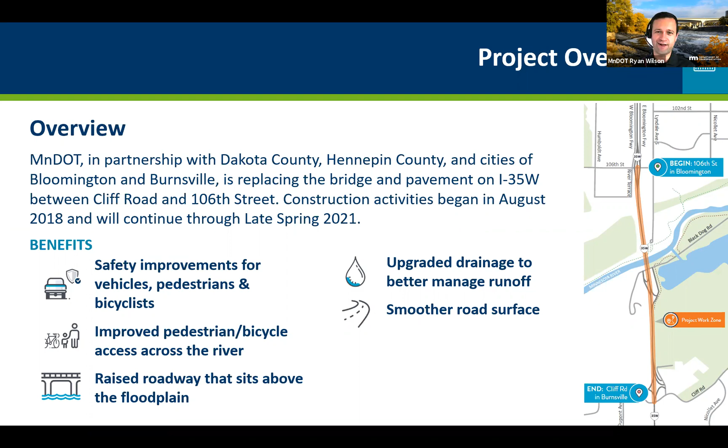We're also facilitating a trail on the east side, which I'll mention in a moment. The bridge itself, and all work on this project, is substantially complete. We have some cleanup items over the remainder of the summer, but the bridge is done. There was a deck planing recently done, a final deck planing of that surface just to improve ride smoothness as we wrap up work on the structure itself.

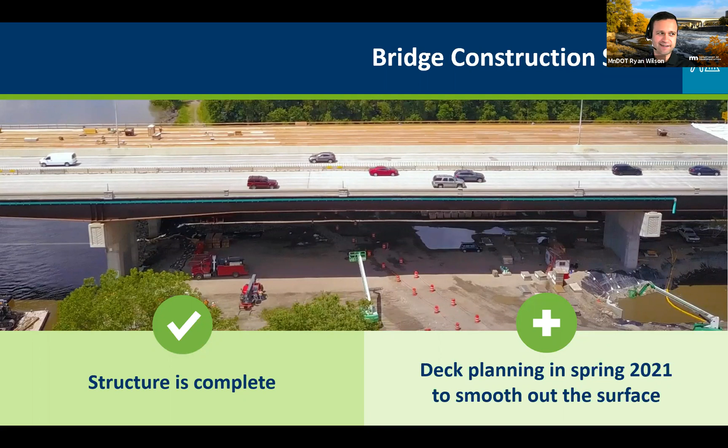The pavement itself is also essentially open. We have the bridge open, 4 lanes open. The final pavement layer was completed a couple weekends ago. Lanes and ramps are now open. You can expect some periodic lane and off-peak closures for wrapping things up - some pavement markings, lighting, and cleanup work at various points of the project.

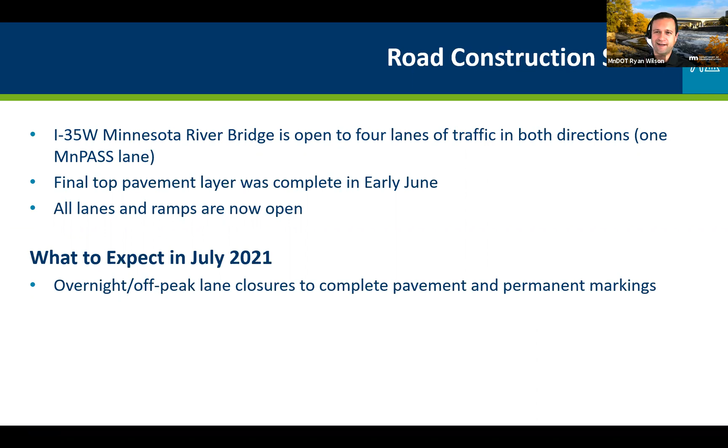I did mention the trail. This has probably been on the radar of quite a few, as Bloomington and Burnsville have an extensive trail network currently and envisioned for the future. This facilitates a new trail on the east side of the bridge to help make connections to the public system, connecting Black Dog Road on the south and Lyndale Avenue on the north in Bloomington. It's a relatively wide structure, allowing walking and bicycling with room to pass, which isn't the case on some of our older structures. We have a joint maintenance effort - MnDOT has responsibility for the bridge itself and longer maintenance, and we have a partnership with the cities on maintenance for snow and ice.

I'll move into a continuation along 35. We have a couple of initiatives, and this is where I'll sneak in my super secret agenda item. South of where the River Bridge project ended, in 25-26 we have a very large pavement project planned on 35 - an unbonded overlay. This means reconstructing the road or building a new concrete road on the existing surface, overlaying the ramps, addressing ADA improvements along the corridor, and replacing 2 or 3 bridges in Burnsville. There will be traffic impacts on the main line and on the bridges. Not all bridges will be closed at the same time - we can't have that kind of limited access through Burnsville and across 35 - but it's significant.

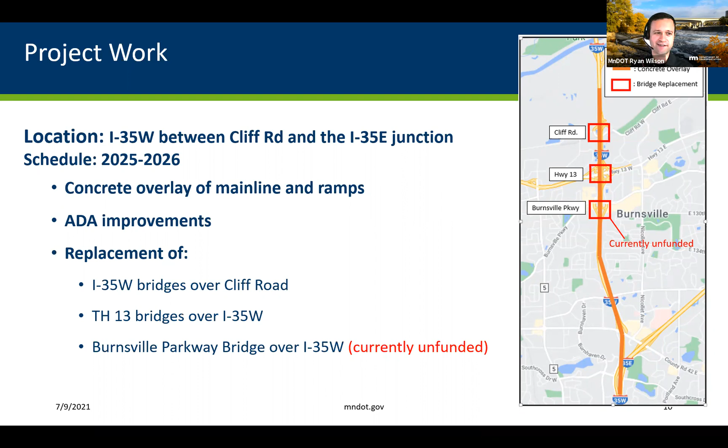The other thing we did in advance of this project is we undertook a spot mobility study to assess what types of things we might be able to add to improve mobility in the corridor. We know I-35, like many of our corridors, has certain locations that could benefit from relatively small dollar improvements and make a big difference in terms of improving congestion, minimizing slow spots, and reducing spot safety issues. So we undertook an exercise to assess where some of those opportunities might be on this corridor, and worked towards including some of them in this project.

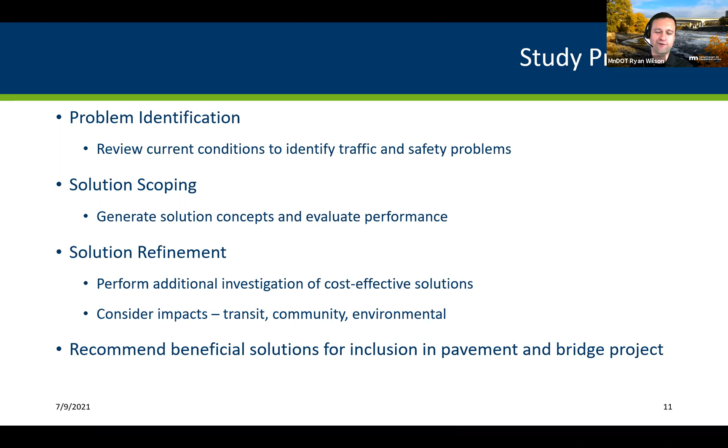I will not go through these in detail. I'll show you the couple that made it out. I just wanted to give you a sense of what we do in an exercise like this. We have quite a few spot locations, and this is a list of some of the ones that made it through the first screening process.

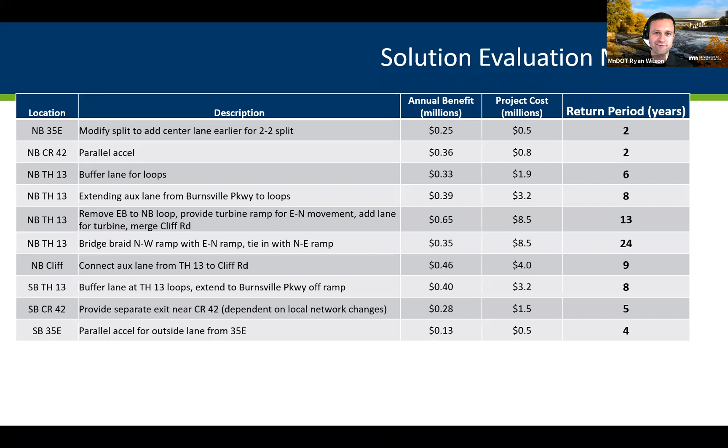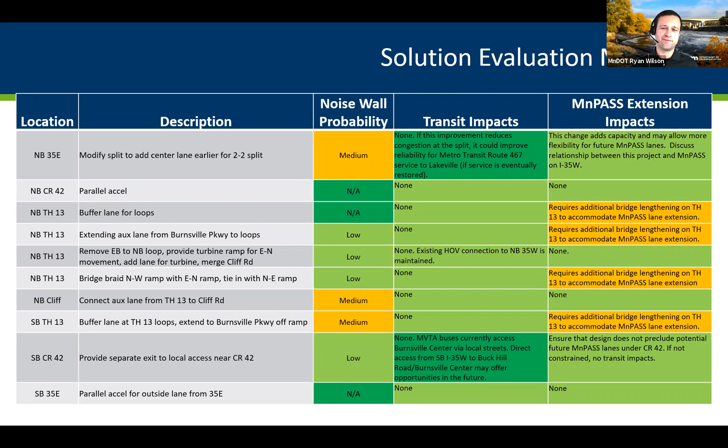We essentially evaluated those spot improvements for their cost and annual benefit, giving us a return period. We also weighed that against less quantitative but important qualitative criteria: noise wall impacts, impacts on possible transit service, and what it would impact in terms of a possible MnPASS extension at a later point in time. And that brings us to a range of feasible solutions.

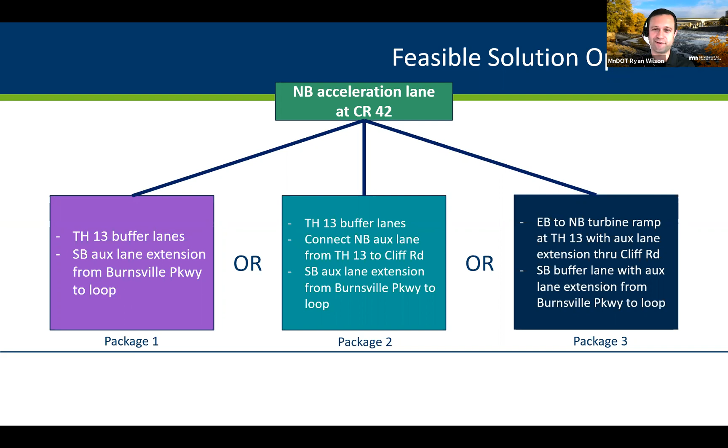This is that northbound acceleration lane. North of County Road 42, this is a pinch point that's been around for quite some time, with vehicles merging onto 35 north from 42. This is one that will almost for certain be included in this project and exist in all the funding packages.

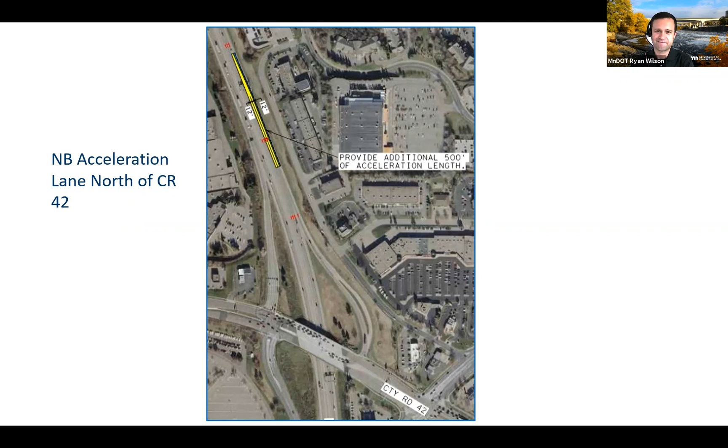This is another concept that did well and is in our base funding package that we plan to include at this point in time. This would be the creation of a northbound buffer lane at Highway 13. The purpose here is to try to provide additional space and opportunities for vehicles to merge from 13 into 35, which is again a fairly known point of congestion. We're rebuilding this bridge, so this allows us to take on this improvement at a relatively low cost, as opposed to doing it by itself at some other point in time.

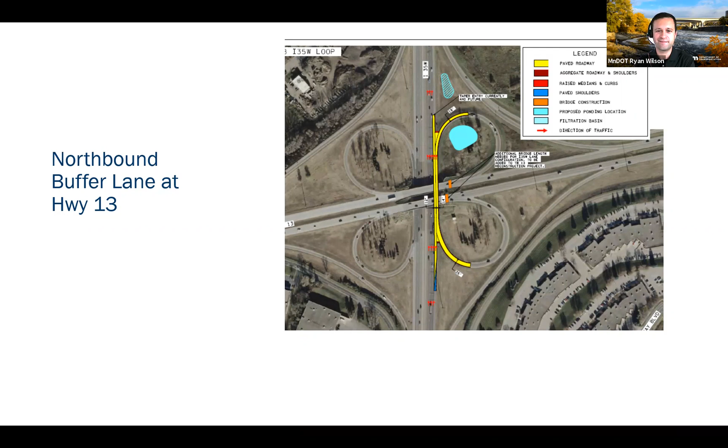This is another concept, in our middle funding package that we're contemplating, with a good chance of getting carried forward. This is a buffer lane in the other direction, again buffering at that Highway 13 merge point with 35 southbound this time, and then trying to extend that auxiliary lane - better called an auxiliary lane - from Highway 13 to Burnsville Parkway.

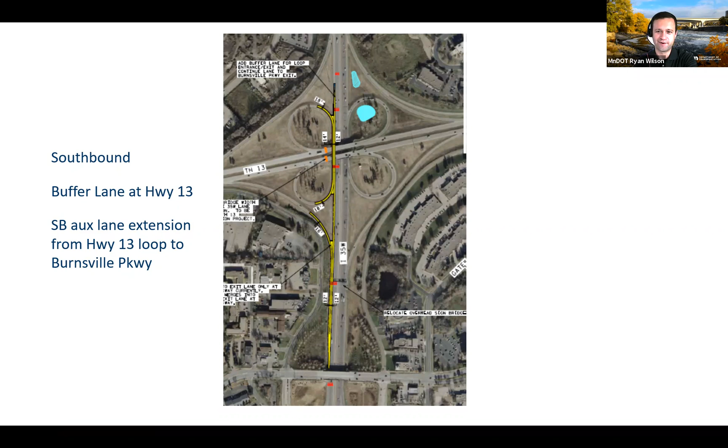And then finally, this graphic for some reason came in very grainy. Apologies about that.

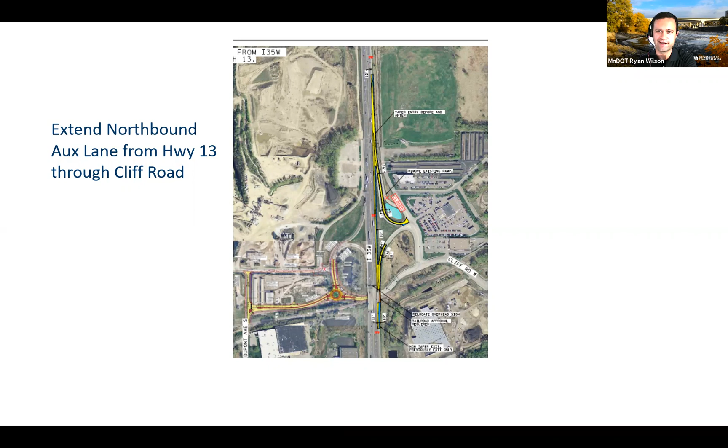And this is the one that is kind of on the farther end of the funding spectrum, but extending an auxiliary lane from Highway 13 up through Cliff Road, again, solves some of those challenges.

Next, I mentioned we're trying to figure out how to weave these improvements into that pavement project, and we have about 8 or 9 million in mobility money that we're trying to package into this broader $90-100 million project.

And so all these solutions have some moderate noise wall risk at Burnsville Parkway and Highway 13, but no impacts to transit. And we would be able to address some of the bridge tweaks that would be necessary as part of our project, given that we're replacing those bridges.

Next, I think I have about 5 minutes left here to talk about Highway 13. So Highway 13, this is a project that may be on some of your radars, that we have a relatively large

environmental assessment going on. In fact, the public comment period just closed last night, if I'm not mistaken, which would be looking at Highway 13 from 101, 169 through Nicollet Avenue in Burnsville, and trying to understand what the needs are on that corridor and reach some type of consensus about what the long-term vision is.

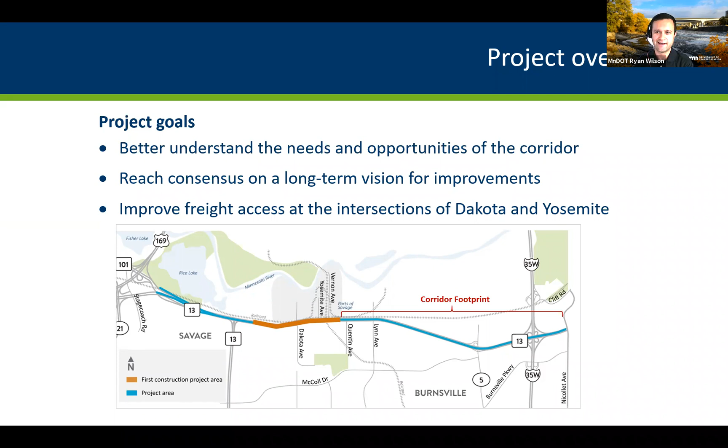Next. And you're all well familiar that Highway 13 is a road that does carry a fair amount of traffic for its size. It is identified on the National Freight Network. It carries considerable freight volume, and it has a number of intersections that have crash rates above what we would call our critical crash rate for similar intersections.

And it's really not—I have attempted to bike along this corridor in part to experience it, and it's not the easiest place to move for bicycle and pedestrians. So I think trying to accommodate those users in this vision is also very important. Next.

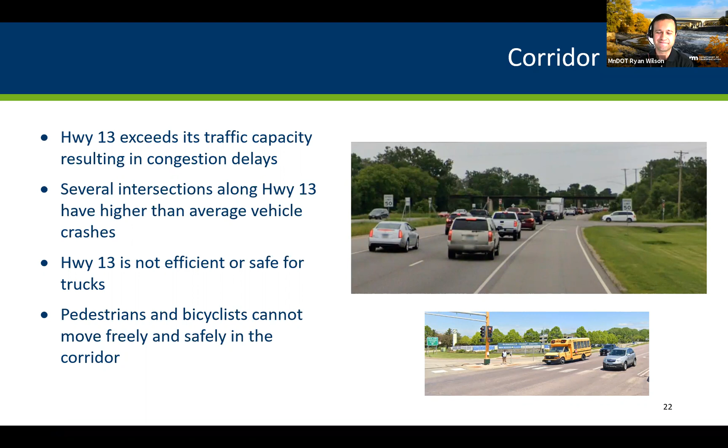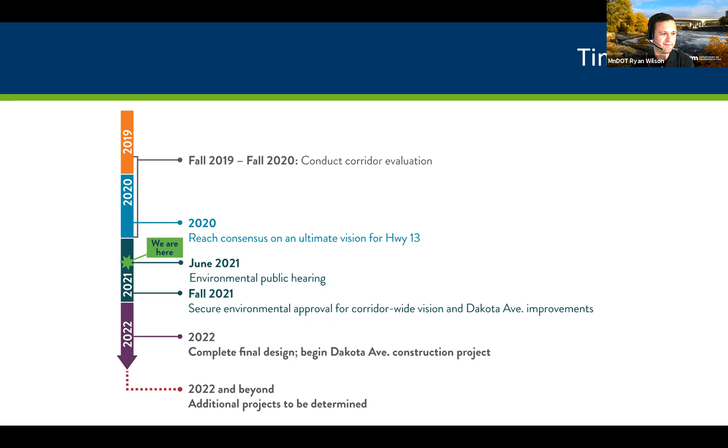So next, please, Jen. So when I talk about a corridor vision and footprint, what does that mean? So we're defining a corridor vision and a footprint of what that vision would require in terms of space or right-of-way needs or environmental impacts for the whole corridor from 101 to Nicollet Avenue.

And by clearing that environmentally—like this broader vision of potential, kind of a maximum footprint, if you think about it that way—by clearing that maximum footprint in one environmental document, it allows us to tackle successive construction projects in the corridor as funding opportunities become available.

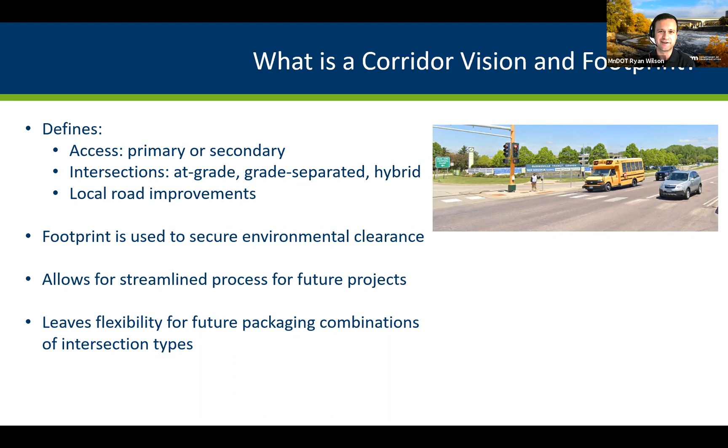And so it's a different process, what's called a hybrid environmental assessment. We're actually the first agency that's kind of undertaking such an approach, and it seems to be working really well, and it really does allow for that flexibility to address the future corridor. You have less work to do if you can look at it that way as you get to future successive construction projects. Next.

If you haven't ever seen this—so the hybrid EA process has involvement from all the partners along this corridor, has undertaken quite a bit of public outreach, and this is the recommended access scenario. Again, future projects could modify this, but this is the recommended access scenario out of that hybrid EA.

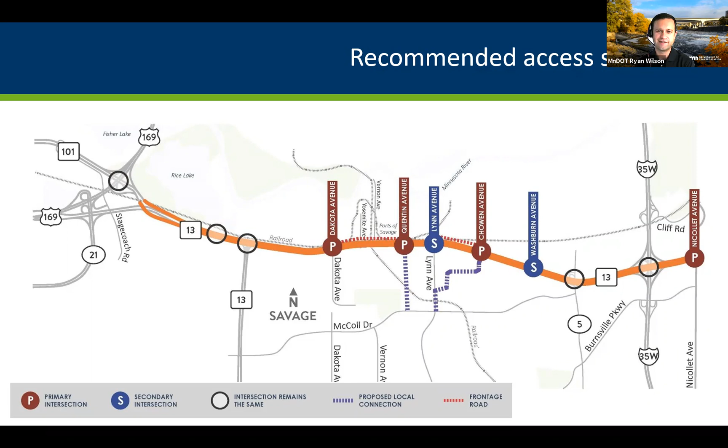Primary intersections, meaning most likely a grade separated intersection, and the secondary intersection would be some type of limited access. The primary is not necessarily fully grade separated. It could be some type of hybrid situation, which I will show you briefly on the next slide, please.

So we talk about various different types of things that can happen at these intersections. That secondary intersection might have some type of at-grade situation. We will probably do something to limit certain movements so that we can maintain mainline volume, minimize safety risks, but also allow some turning movements to key destinations.

Hybrid and freeway or grade separated would be the type of treatment more likely contemplated at those primary intersections—so Nicollet Avenue in Burnsville, for example. So there's different types of treatments you can use, either a full interchange or something in between, where you direct some movements to key destinations but don't necessarily build the infrastructure associated with a large interchange.

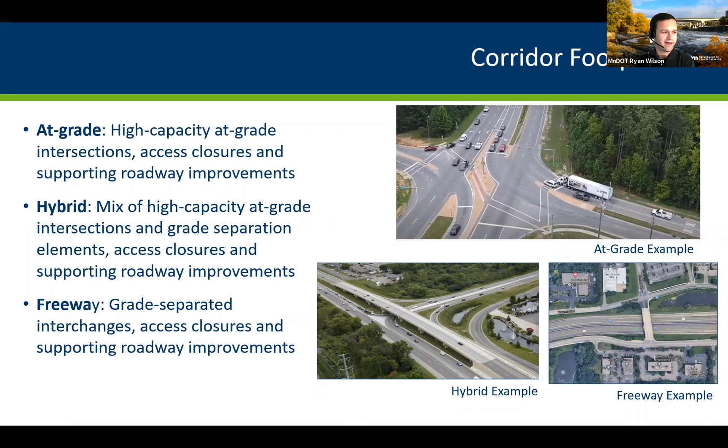Next, the final two slides will cover what we're doing right now. We have this larger EA which is concluding the public comment period, as I said yesterday, and eventually hoping to get a finding on that environmental document that allows us to move towards construction.

The first construction project is coming along pretty quick. There is a new interchange being built at the port of Savage, roughly from just west of Dakota Avenue through Yosemite. We are building an interchange there, but also realigning the frontage roads in this area, which serves considerable freight and shipping volumes and has a very high amount of truck traffic turning.

Those are unique characteristics we had to contemplate, as well as allowing for storage of trucks far more than we normally would along frontage roads, because that's UP's main line on the north, and trains can move through there at fast or slow speeds. So we need to allow trucks a place to pull over and park, and continue to allow vehicles to access businesses when trains move through that Dakota intersection.

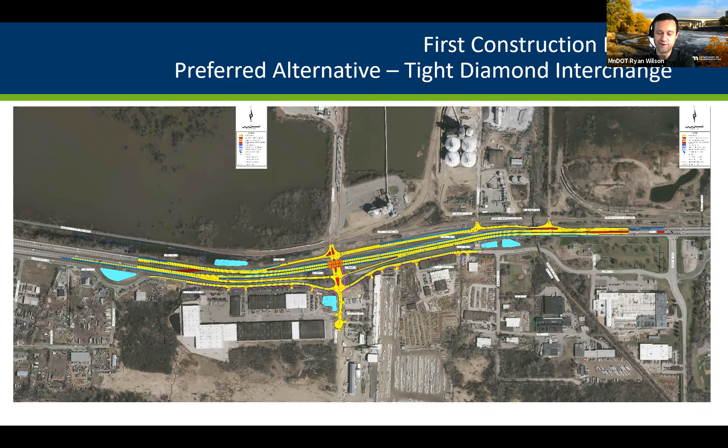So that is going to also be a two-year project. Next slide, this is the last slide, I believe. Yeah, so this will be a two-year project.

This is a slide from our open house, and this is what we're currently contemplating from a traffic management standpoint. We'd have what we call a chute type concept, where we maintain a lane of traffic in each direction during construction and allow access to the businesses. Since we're essentially not allowing left turns during construction, we would have some type of U-turn access on each end of the project.

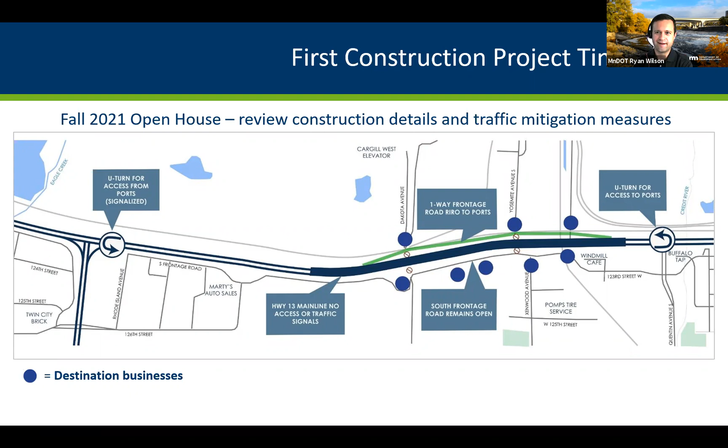This project is scheduled to begin construction in 2022 and continue through most of 2023. I think that's it from a slide perspective.

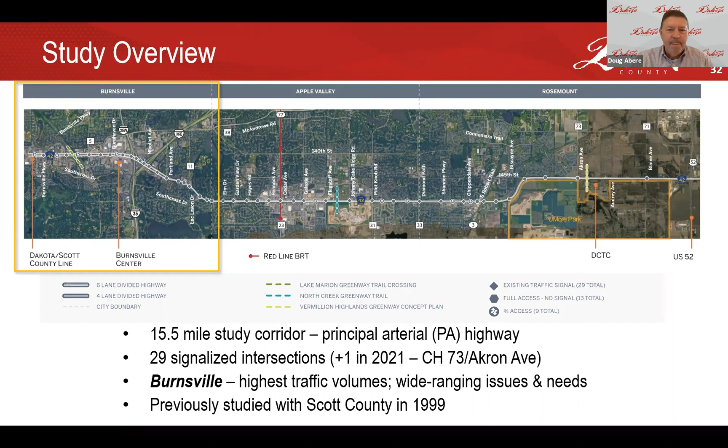The process and status: we are approaching the end of the substantive analysis part of this work, and we are pulling recommendations together now. Again, much of what we're looking at is very long-term, and I'll touch on the context for how we manage the corridor over a 20-year period as I move forward into the presentation. But of course, we're actively pushing the messaging out right now, sharing previews of this vision, and listening to questions and feedback. I think I mentioned the open house next week.

The goals and objectives—I won't dive into this slide too deep, but you might know that local comprehensive plans have been updated on this same cycle, so we're matching into that. The work we're doing fits well with some of the forecasting that's been done for traffic and land use, and this plan creates guidance focused on Highway 42.

I'll touch on some ideas on managing congestion and delay, access, and the trade-offs of access along a corridor like this, similar to what was just discussed on Highway 13—a very big part of what you do in planning the corridor. Quite an emphasis this cycle in looking at pedestrians, bicycles, and transit. And I think most important is we prepare a plan so we've got tools and options ready if and when needed, as traffic actually presents itself along the corridor. Forecasts are one thing, and reality as we move forward is something we monitor.

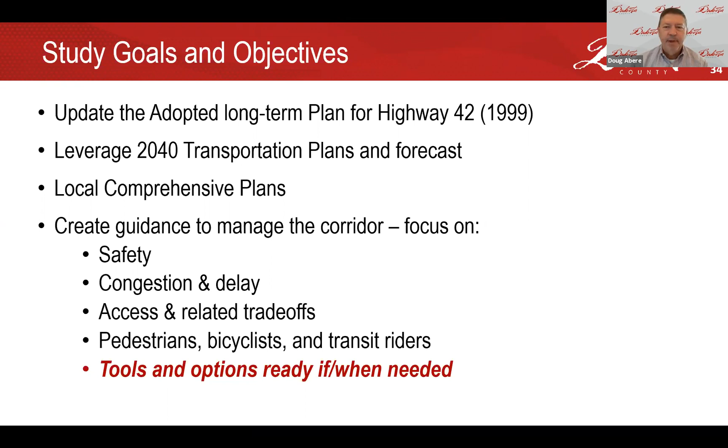Important to give you this overall vision—this may look general, but there's analysis behind it that allows us to say that as we look at Highway 42, we've got 6 basic lanes of roadway in much of Burnsville out to around Portland, toward the east side of Burnsville, and generally 4 lanes from there to the east. We've looked at our intersection and access management issues, and our vision can be held to an opportunity to reduce or defer the need for expansion. So further basic expansion of 42 is not something we want to pursue. We don't need to pursue it—we have other ways of managing the corridor. That's not to say we don't need more capacity, but there are ways to manage those needs looking forward, and that's the emphasis of the plan.

I've touched on some of these other ideas. Just want to emphasize again, near the bottom of those bullets, we're looking at serving all travelers, both the motorists and the other modes. So that's an important element of the study.

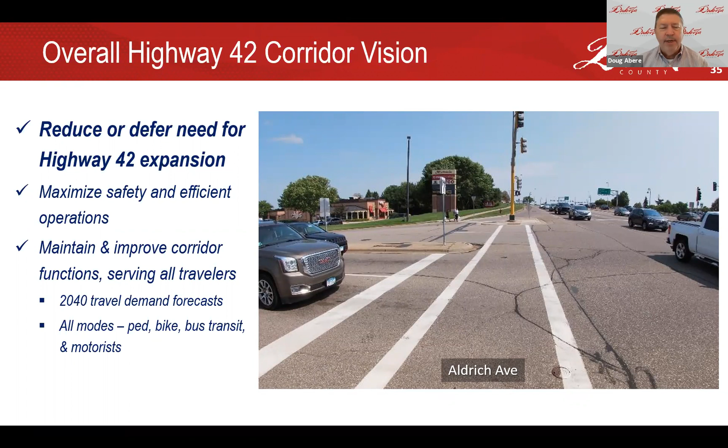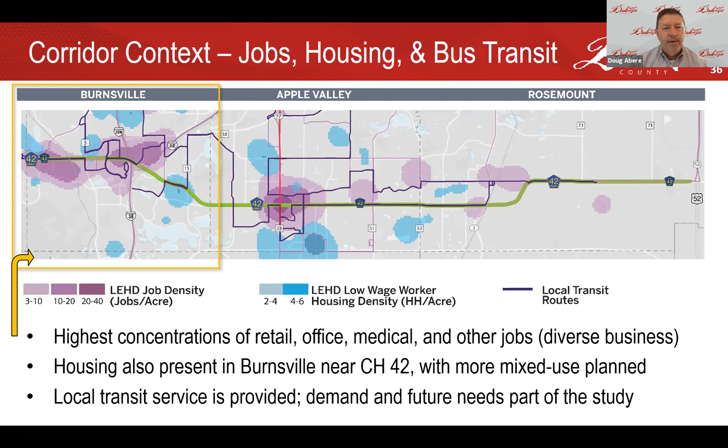This graphic also illustrates that there's higher density housing, and you get a sense of the connection between Burnsville and the core of Apple Valley as a likely emphasis for transit service. That has in fact borne out to be the case and continues to be the focus area for that type of service.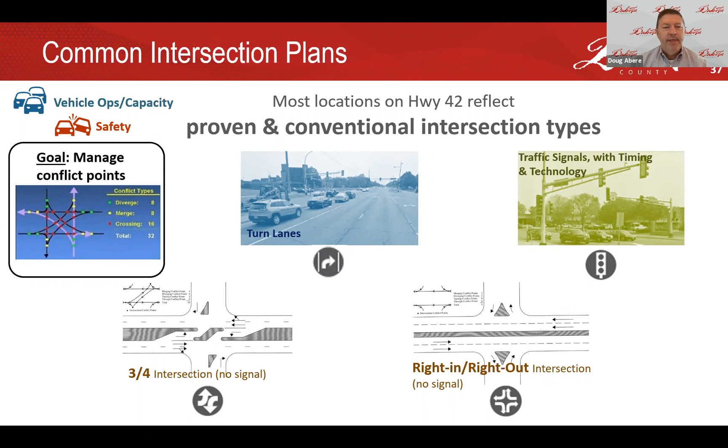Just basic vocabulary here as we look at how to manage intersections, not unlike what Brian talked about for Highway 13—looking at how to manage conflicts. There are many conflict points at a typical all-directional intersection at grade, and opportunities for management of those intersections include improving movements and capacity through turn lane adjustments, signal technology, and more engineered solutions, sometimes removing signals. We can reduce the number of conflicts significantly when we go to a three-quarter intersection or a right-in, right-out, which you're probably familiar with along segments of Highway 42 already. These are not new tools—similar to approaches used in the 1999 plan for 42.

Something that is evolving and important to this corridor, in terms of how the county might wish to manage things working with our local partners, is technology. We've had questions from all three city councils about the role of technology, signal timing, and connectedness along the corridor, and this also relates to alternative routes. The point is it's not just 42—as we look at management of 42 in the future, we may look at supporting roadways and even expanding connected systems. We do have connected signals through fiber optics along 42 currently, but we don't along a route like Southcross. Southcross is an example of a local city route that supports 42 and doesn't have as much of that technology deployed. So it's a possibility for the future, and I think that's what we'll conclude in this plan, with more to look at down the road on these types of ideas.

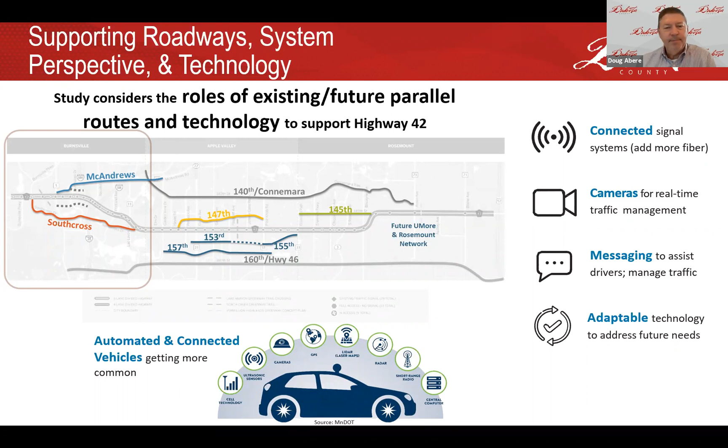This gives you a preview. I know this is pretty simple and schematic, but it's working from that orientation I gave you a little while ago, that we look at each intersection one at a time, how we might manage it for the future.

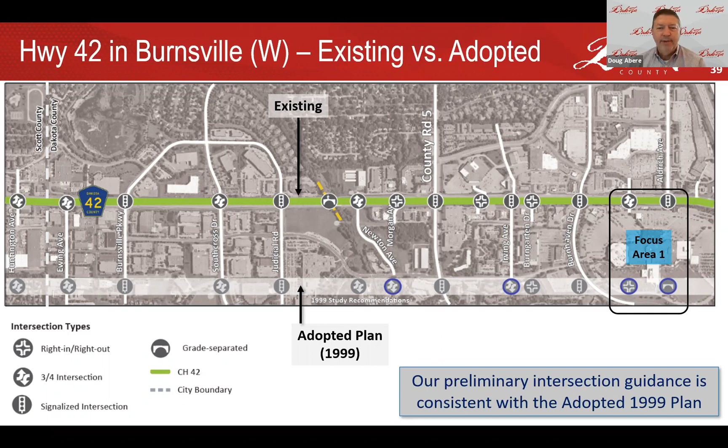I've got a focus area coming up, you can see on the right hand side of this slide, so we'll move right to that. That's in the Burnsville Center area. You probably know that the city has been working hard on the Burnsville Center Village area and the vision for that.

There are some ideas for how the future network might work, including principally Aldrich Avenue becoming more of a principal north-south boulevard with some capacity, doing a pretty good amount of traffic handling on it as a possible vision through this redevelopment area.

That vision also looked at a bike ped underpass west of Aldrich, and you can just see it in the orange crossing that's illustrated there. And then there are transit service issues that feed into this, the future Orange Line extension, for example, which is envisioned to come in at some point in the future, and probably tied a little bit with development. Many things tied to development up here.

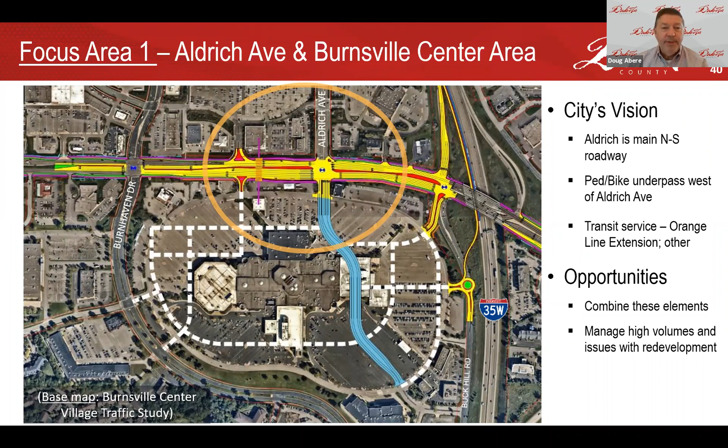From a Dakota County standpoint, one thing we looked at here is opportunities to combine elements and also manage high volumes and issues with redevelopment. You can see there's a lot of yellow on 42 there, indicating possibility of reconstruction. We're trying to, as I mentioned before, limit or avoid expansion of 42, even along a relatively limited segment like this. So I'll move forward and show you some of the ideas we're considering.

We've looked at some concepts that would involve Aldrich crossing underneath 42 and then connecting back through some reconfigured intersections as part of the future roadway network out here. I'm not going to present all those various ideas because they're all alternatives and we've got many years to figure out those choices. But the main point is that there's an opportunity and the grades work well to go underneath 42 in this area in general. We think combining a roadway with improved pedestrian and bicycle connections might be a possibility for the area.

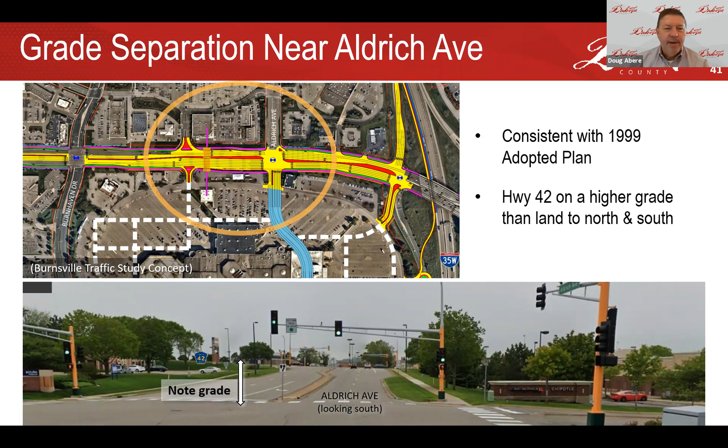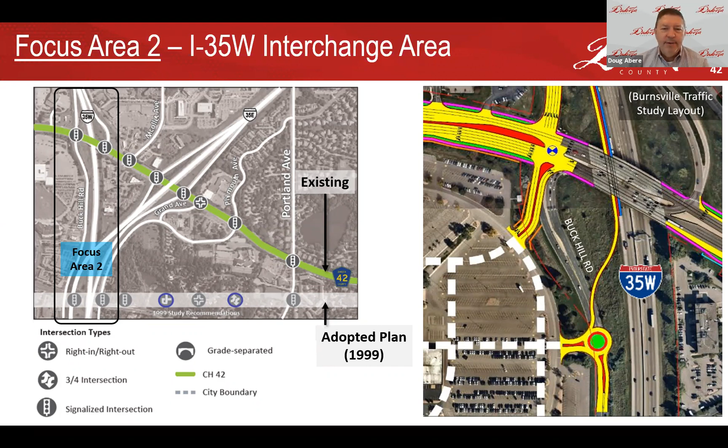If you go to the next slide, I'll mix it up a little more. This is very schematic and simple, but another thing the county and the city did bring to the table too. We were talking about this near the end of the city's study of traffic and transportation options for the Burnsville Center redevelopment—also considering a loop ramp to take traffic from southbound 35W underneath 42 and then looping back to eastbound 42. So that's a very heavy movement.

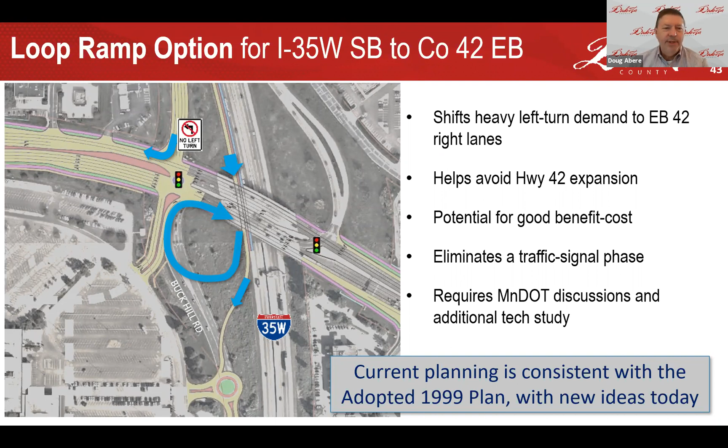It has potential to provide some benefits. We're currently looking at a number of ideas here, and the main thing to think of is that there are many alternatives, many possibilities on how to combine these elements. We are talking with the city and MnDOT about a possible funding application that might include some of these elements. So that's kind of where we're at right now. Jen might refer to that later. And I would say don't take everything quite so literally when you look at some of these drawings, because we're still working on alternatives.

Did I mention that we have an in-person public open house next week on Thursday from 4 to 7 at Redwood Park in Apple Valley? The neighborhood over there is very connected to Burnsville, so we've got the eastern side of Burnsville and the western side of Apple Valley kind of coming together at this location. So it is your city too. There are some business district interests out there, especially in Apple Valley, I have to admit, more so. But when you get over to Lac Lavon and so forth in Burnsville, you're also seeing that kind of district where we've got interest in hearing from people.

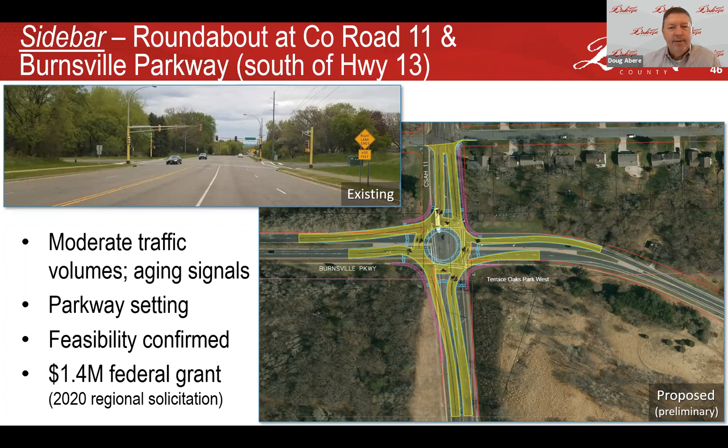This is a Parkway setting. There are points to be made for the value of this in terms of how it could work with the setting out there next to Terrace Oaks Park West. The feasibility of a roundabout is generally confirmed. We've got a little more work to do on that, but we'll move into more studies and design. This looks like a pretty strong go as far as all parameters. We received a 1.4 million federal grant, and we're targeting 2024 construction. So that's the update on that one.

You can find anything about Dakota County by going to our webpage, dakotacounty.us. It's similar to Google, so you can just search for what you're looking for, like 42 visioning study. There's my email address, and I look forward to following up with you as you like. I'm happy to take your inputs, and if there are any questions, if we have time, I'll be happy to do some of that right now.

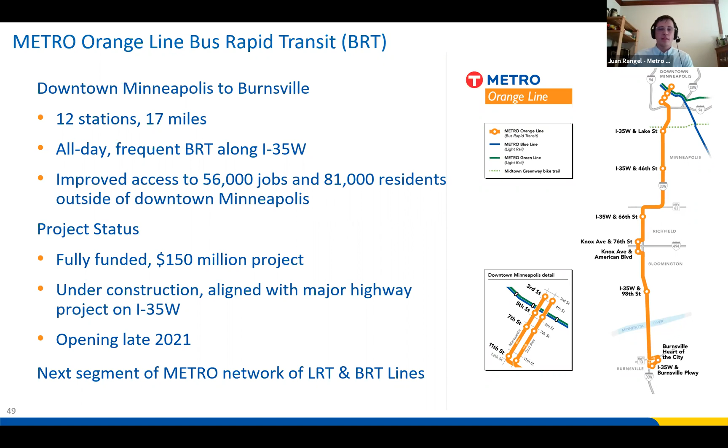You have operational lines like the Blue Line and Green Line, as well as lines under construction like the Orange Line, the D Line, and the Green Line extension known as Southwest LRT, plus several other planned lines. These metro lines provide faster, high frequency transit in the region's busiest transit corridors.

They use specialized vehicles with bigger capacity, and they have stations which provide improved waiting areas. Stations for these lines, if you've ridden light rail, have similar features: you pay before you board, and you can purchase your tickets at a ticket vending machine at the station.

Stations have real-time bus arrival signs, heating, lighting, bike parking, emergency telephones, cameras, landmark signs, and information kiosks. Those are some of the ways we provide an improved experience with the metro system.

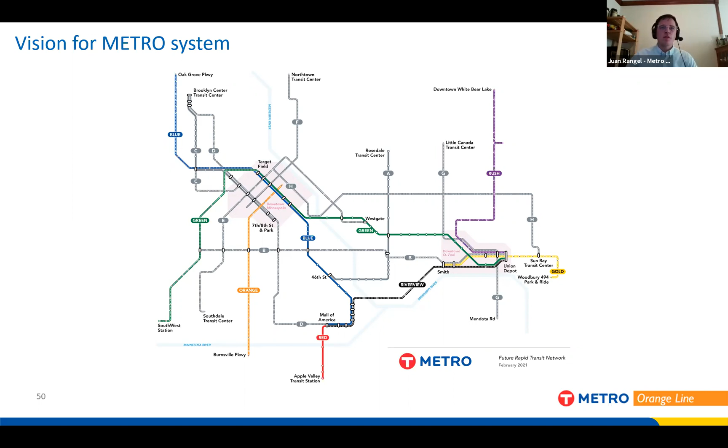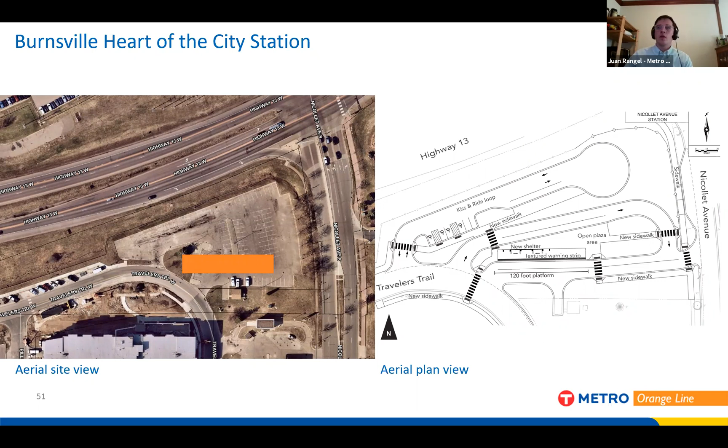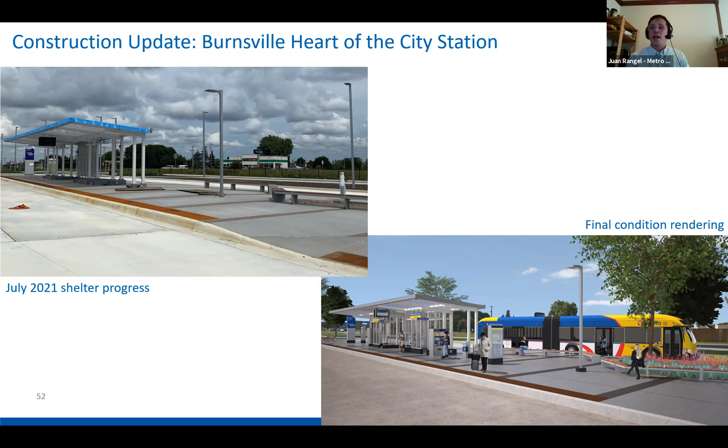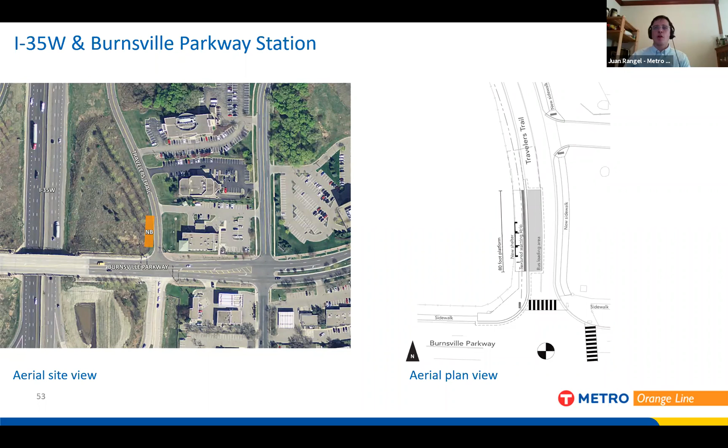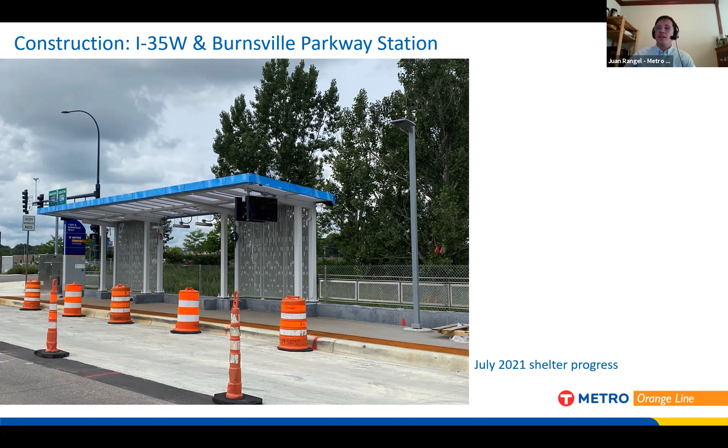Dan Keeley mentioned in the chat, I think for those of us not in transit day in and day out, there is current express service from MVTA that goes from Burnsville to Minneapolis and vice versa, but it's more of a periodic schedule, is my understanding. And then this is more of a commuter thing that would run, like you said, every 10 or 15 minutes, has multiple stops, but is more regular. Does that, in layman's terms, sum up the difference?

Yeah, so this is not really an express route. If your destination is downtown Minneapolis, the express route will probably be a bit faster because this one will make all the stops in Bloomington, Richfield, and Minneapolis. I think we're looking at overall travel time between Burnsville and downtown Minneapolis in the 35 to 40 minute range. One thing that's different about this is that it provides that service all day, not just during rush hours. So it offers the opportunity to not just travel during rush hour, but to work second or third shifts in Burnsville, or just visit any time of day, afternoon, weekends as well.

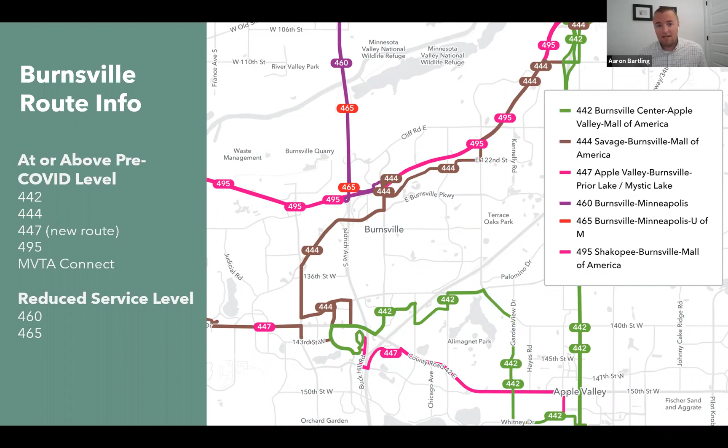And we've actually had an opportunity to expand service in some areas. You can see the 447, which Doug had mentioned previously, on the south side operating along the 42 corridor. This is a new route we've implemented, and I have a slide with more details on that route. Our 495 service provides nice connections out into Shakopee at Marshall Road, and some connections in Savage as well. For Minneapolis Express service, we're currently running our Route 460, our highest ridership express route, and 465, both currently at reduced levels compared to pre-COVID.

So that's a little bit about where we're at. Now jumping ahead to where we're heading: with the fall service change, effective in September this year, the biggest focus is the return of express service. We anticipate a return to office for many downtown workers and University of Minnesota staff and students, so we'll be prioritizing getting service back into Minneapolis and St. Paul, and prioritizing those highest ridership routes pre-COVID to make sure we're meeting demand as employees return to work downtown and have the express options they need.

Another big focus of our downtown express routes that will impact riders is utilizing the new Lake Street station along 35W, and the 12th Street transit ramp going into downtown. These are both wrapped into the Crosstown to 94 project along 35W, and those will be wrapping up this fall. We'll be utilizing both of those facilities to improve reliability and make sure our routes are running on time. Some nice benefits we're looking forward to using.

Next slide. So then again, touching on Route 447. This is a new route that MVTA launched in February of this year. It came out of some pilot routes we were testing over the winter, and needs we heard from riders, as well as needs that came out of various studies in our service area that highlighted the need for east-west transit connections along County Road 42.

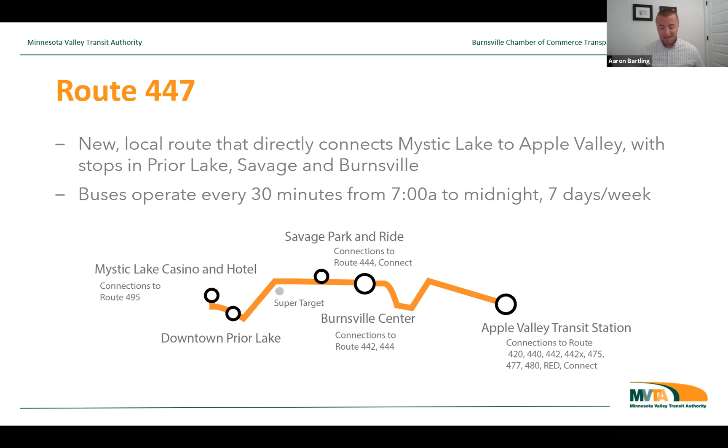Another big update to share with Connect: with our fall service change, we will also be expanding our Connect service. The biggest impact to the Burnsville area will be extending the hours to 9 p.m. Currently we end at 7, so we'll be extending it by a couple hours into the night. And then we'll also be adding service in Eagan. It'll be more of a standalone service area, but with opportunities to connect to it through fixed route from Burnsville.

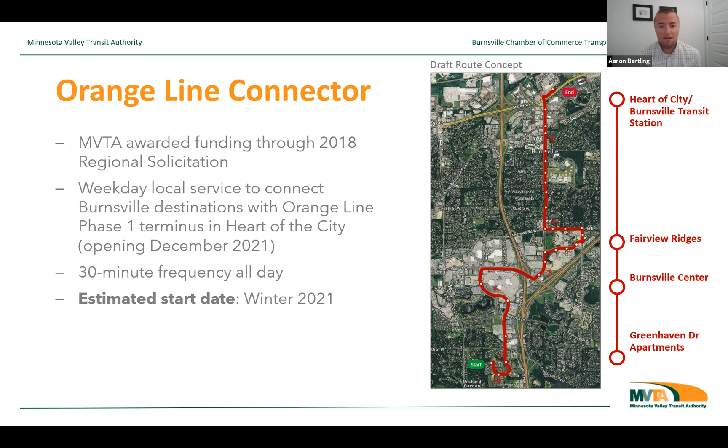Touching on special event service and what we've been working on this summer. The biggest one we started with was our For Fun bus.

This service provides connections from Mall of America and regional transit connections out to Shakopee and Prior Lake, serving Mystic Lake Casino, Canterbury Park, and Valleyfair. It's a weekend-only route, initially driven by a need to serve Valley Fair, but we also saw an opportunity to hit a couple other destinations.

So far that route's been going well, and we continue to see ridership increases weekend over weekend. We've also been working with the Prior Lake Lakefront Music Fest, relying on existing transit service like route 447 to get event goers to the festival. For Twin Cities Summer Jam, we're providing a shuttle from a park and ride to help with parking needs. We'll also be doing some Vikings service to their training camp later this summer, and our Vikings shuttle is expected to return for Vikings home games this fall and winter. We took a break from that during COVID, but we'll be bringing that service back.

I wanted to touch on these to show that MVTA is very interested in special event services. So as things come up in the Burnsville area, feel free to reach out, and we're always willing to consider how we can help—ranging from just staging a bus to provide shelter if it's super hot out, which we've already done this summer, to providing service to help with parking needs.

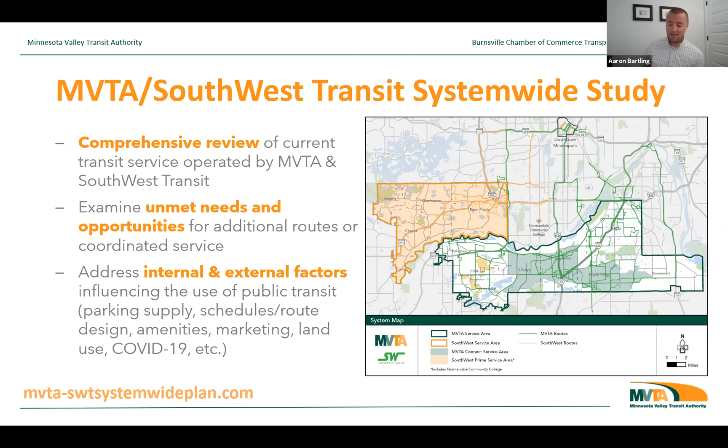I put the website up there, but you can also go to MVTA's website to find access to more details. The last thing I'll touch on is an upcoming focus group related to the system-wide study.

We actually have two focus groups next week, one on Wednesday and one on Friday. These are aimed at employers in the area as well as potential new riders—a great opportunity to share feedback, concerns, or needs that you or your business have, to directly impact how we design our future network for the study.

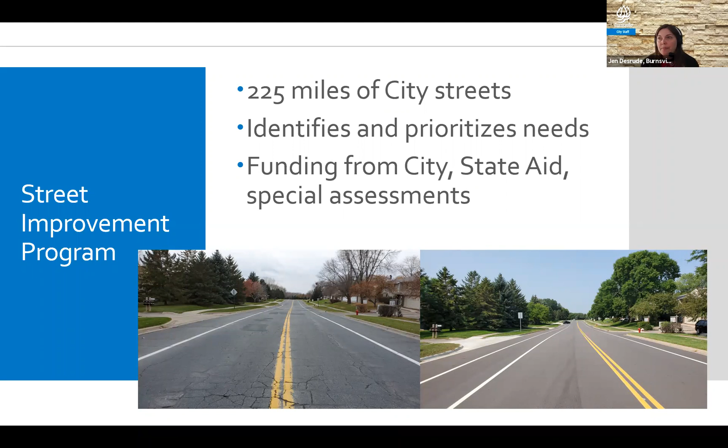So for 2022, I wanted to call out a few areas that we're proposing.

Each year we do about 8 to 10 miles of street work, and a lot of them are in residential neighborhoods, so I wasn't going to show all of the details of those. These 3 areas are more in our commercial areas, which might matter to this group.

We are going to be doing a street rehab in the heart of the city: 126th between Nicollet and Pillsbury, and 125th and First Avenue. This has been on our list for a while, but there's been so much redevelopment in the area that we're trying to find a window to get these streets in so construction is slowing down. We don't want to repave streets and then have them torn up again by construction vehicles, so we're hoping for a brief pause in the redevelopment to get these streets in before it picks back up.

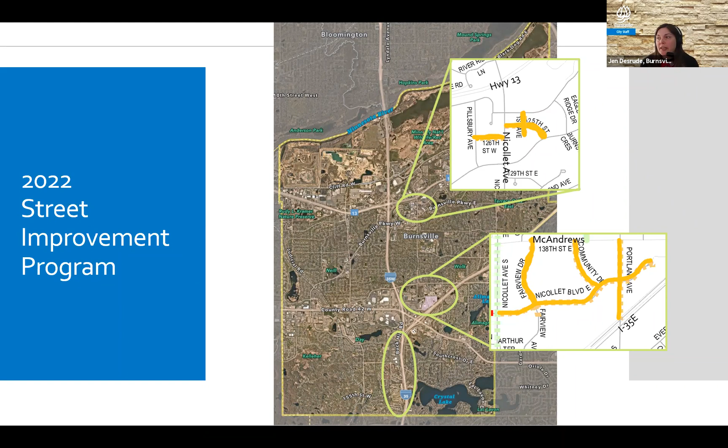Also in the medical campus area, we're going to be rehabbing Nicollet Boulevard, part of Portland, Community Drive, and Fairview Drive next year. And on Buck Hill Road, south of Southcross to the border with Lakeville, CenterPoint Energy is currently doing a pipeline project, so we deferred our project to come in after they are done with their work.

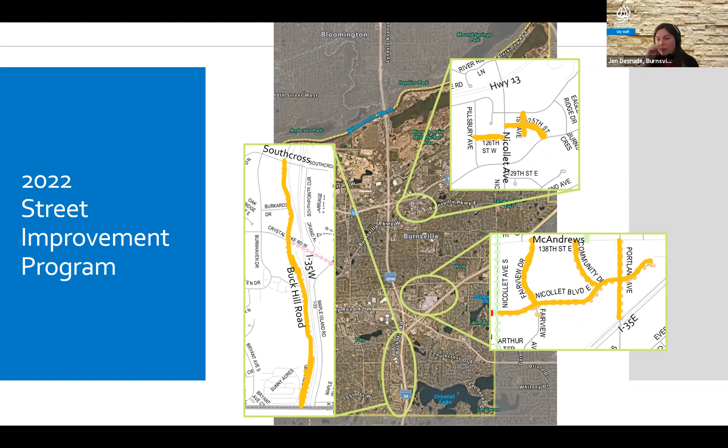We have a few trail projects. The Lake Marion Greenway is a 20-mile corridor that touches 4 cities, and we have 3 segments of that in Burnsville. 2 out of the 3 are complete now. A few years ago we completed a half mile from Kraemer Nature Preserve to Williams Drive.

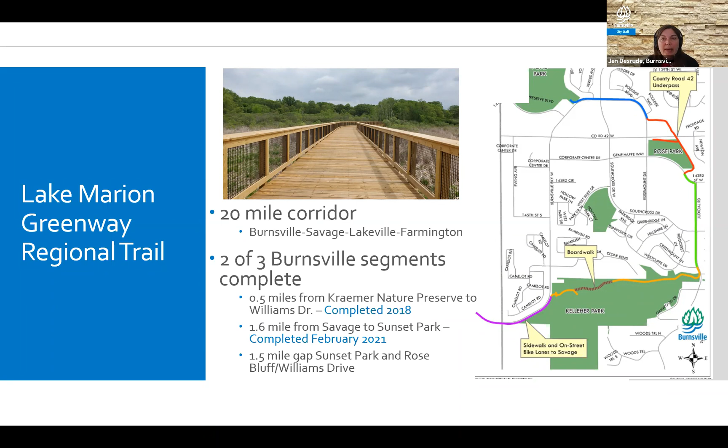We're actively pursuing an alignment for that gap and working with Dakota County on funding. The Cliff Road Trail is a project that's 3/4 of a mile on the north side of Cliff Road between Trunk Highway 13 and just into the Eagan border, about one block in, to connect with a trail that's already there.

We received a federal grant, I believe in 2017, and we've been working on design ever since. I'm very excited that construction begins on that trail next week. It's funded with a federal grant, Dakota County is a partner, and we also have some city funding.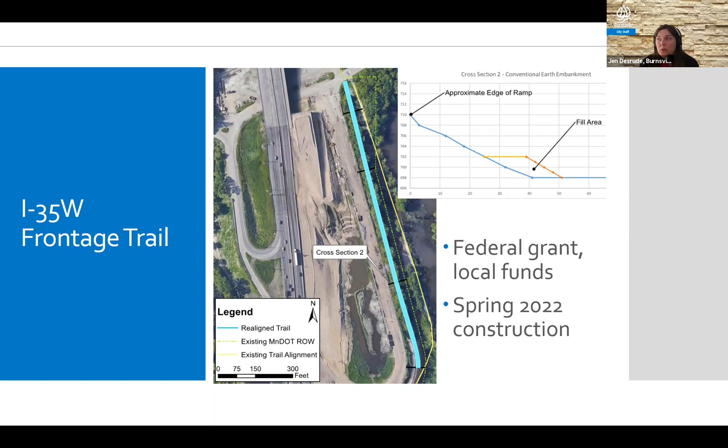Moving off of the local roads and trails, this is a regional project at 35W and Cliff Road that our public works director in Burnsville has been working on for a few years. This is a freight improvement, a transportation improvement project.

We're anticipating spring 2022 construction. We received a federal grant for this. Dakota County is a partner, city funds are paying, and we also have a DEED grant that we're using for that project.

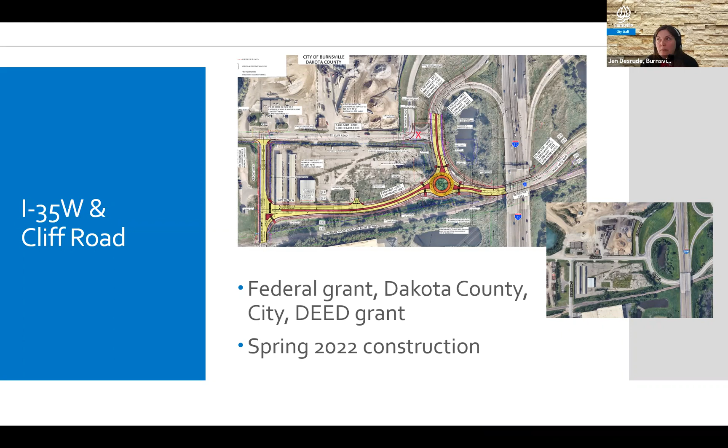Currently, I'm working with a group on a multimodal and complete streets study. We're actively in the public and community engagement part, and I'll talk about that on the next slide. Our multimodal systems plan involves a consultant looking at existing conditions, seeing where the needs are, and engaging the public to see what Burnsville residents need.

We're reviewing new mobility options, things like Bird scooters, HOURCAR, or Nice Ride, looking to see where those might fit into Burnsville. We do have 5 EV charging stations in the heart of the city, and we're looking at potential for increasing those and finding locations for more. Our consultant is providing recommendations for multimodal improvements, implementation, prioritization, and a funding plan.

So it's a big project. I've gotten funding, the city is funding 70% of it, and we got a SHIP Dakota County grant for 30% of this study. Part of it is also to establish a complete streets policy with design guidelines.

For how to implement some of these, and what kinds of things we should look at when doing our street projects, including multimodal components.

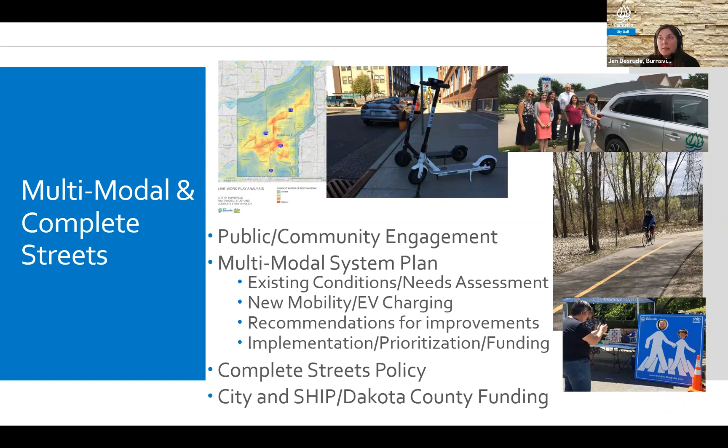To participate, we have a standalone website, walkbikerideburnsville.com. There you'll find all sorts of information about the study so far, including an online survey and a wiki map. I encourage anyone interested to go to that online survey, whether from a business perspective or your own personal perspective, and give us information to help guide this study, guide where we want to do improvements, and help guide the prioritization.

The wiki map is where, if there are specific locations, you can pinpoint that this is a problem crossing area, or that we should really have a trail here. You can mark it up on a map, and that's all being put into one big map that our consultant is using to find the hot spots where we need improvements in the city.

The last thing I'll touch on are a couple of grant opportunities the city is pursuing. The first is called the RAISE grant, Rebuilding American Infrastructure with Sustainability and Equity, because all grants have to have a fun acronym. This is part of what Ryan Wilson from MnDOT talked about, the Trunk Highway 13 corridor vision.

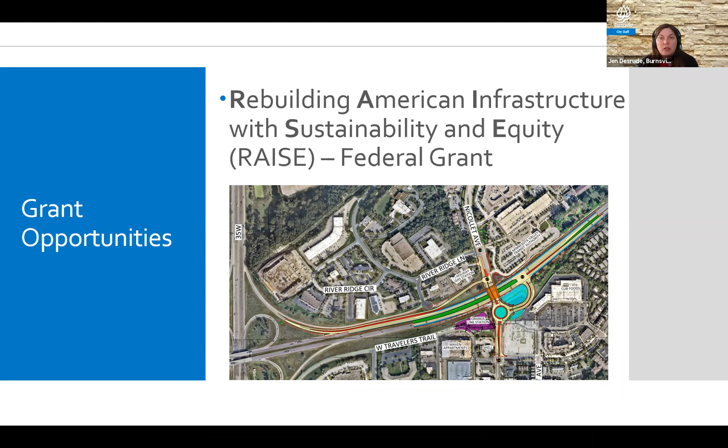So we're going to be making that application, due next week I believe, and we're hoping for the best. This is a pretty high priority project for the city, getting multimodal crossing of 13, and it's also good for vehicle operations, all modes, and transit.

The other grant opportunity we're pursuing, a partnership with Dakota County that Doug Abere mentioned briefly, is a Transportation Economic Development, TED grant through MnDOT, and a Transportation Economic Development Infrastructure, TEDI grant from DEED. These applications are due at the end of August, so we're just starting a preliminary look at it. As Doug said, this is a real high level concept right now, and we're delving into more detail.

The project we're applying for is a slip ramp that would split off a separate ramp from 35W South, under County Road 42, and then into a roundabout providing access to Buck Hill Road going south or into the Burnsville Center. This is an exciting opportunity, two grants in one year.

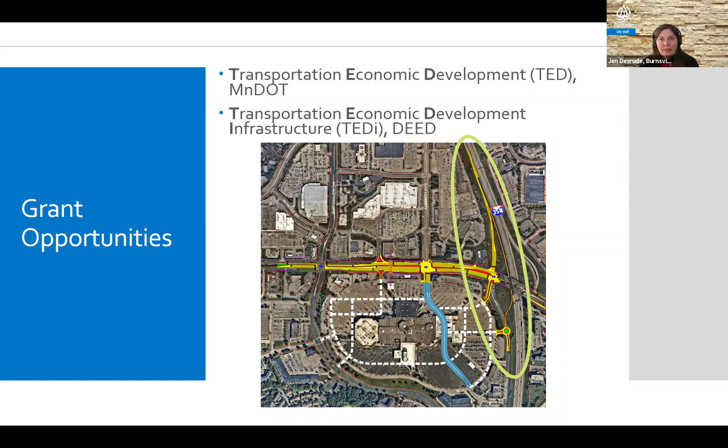Hopefully we can get one or both of them, that would be pretty fantastic. So that's the end of my presentation. I think we could open it up to questions for anyone at this point.